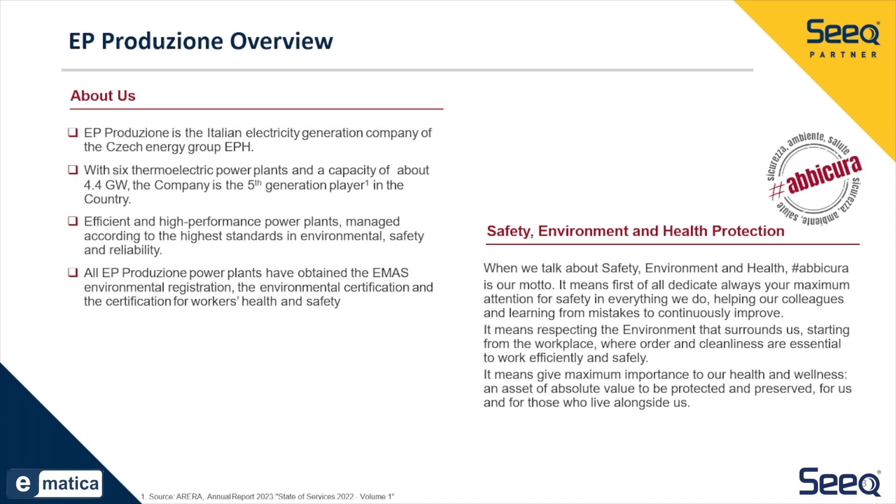EP Produzione is an Italian electricity generation company belonging to the Czech energy group EPH, with thermoelectric power plants of a capacity of about 4.4 gigawatts. Our plants are high performance and efficient, managed to the highest standards in environmental safety and reliability. All plants obtained the EMAS registration, which is an environmental certification for health and safety.

Our company really cares about safety, environment, and health. Our motto is take care, which means being careful at the workplace, to our colleagues, to our partners, to our clients, protecting our environment starting from our work environment, and giving importance to health and safety. These are our company standards for safety, environment, and health.

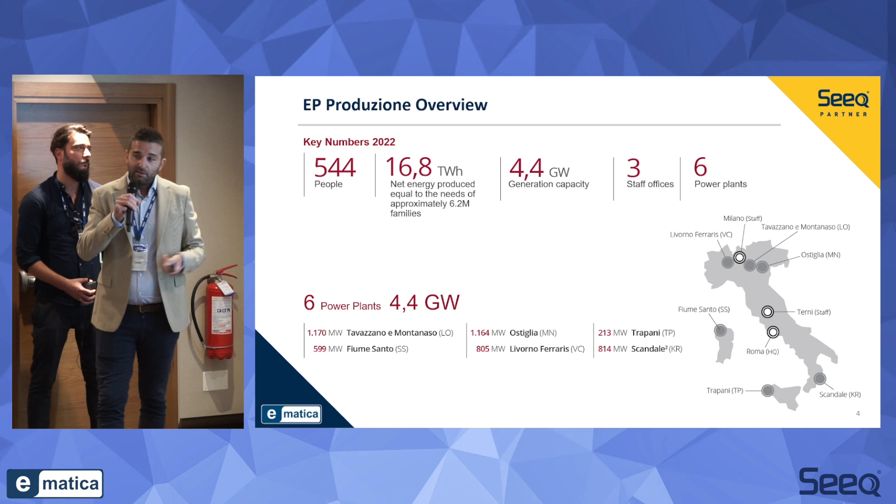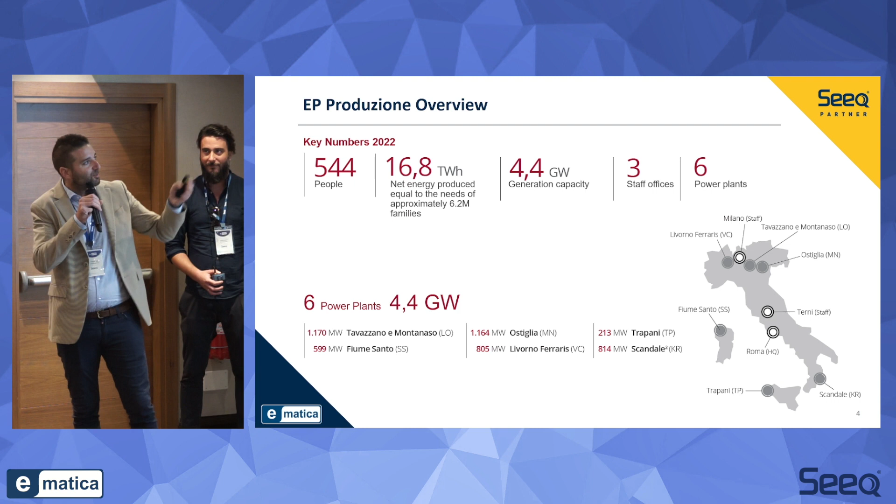Just to give you a few key numbers from 2022: there are around 540 people in our company. As Jessica said this morning, many people are older than 50, so that's a pretty appropriate number. We have a net energy production of 16.8 terawatt hours, covering approximately 6.2 million families, with 4.4 gigawatts of generation capacity across 6 power plants and 3 headquarters in Rome, Milan, and Terni.

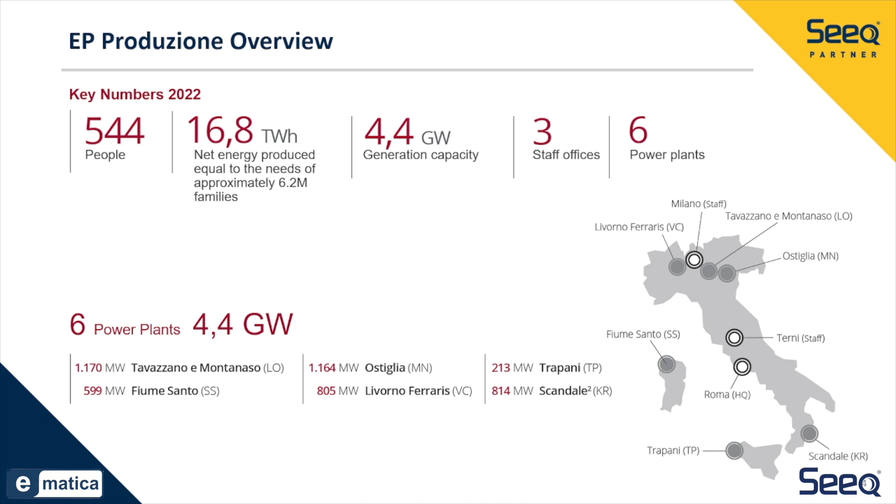With plants in the north: Tavazzano, Montanaso, Fiume Santo, Ostiglia, Livorno, Trapani, and Scandale.

We are continuously investing in improvement processes for our plants. We are currently building 2 new power plants, one in Tavazzano and Montanaso and one in Ostiglia, using the latest quality, performance, and low emission standards. In Fiume Santo, we are planning a multi-technological hub: a biomass power plant project for the production of onshore and offshore green hydrogen and storage systems.

As I mentioned before, we are part of the EPH group based in Prague, one of the largest electricity producers in Europe, with business activities in the Czech Republic, Slovakia, Germany, the Netherlands, the United Kingdom, Ireland, France, Switzerland, and Italy.

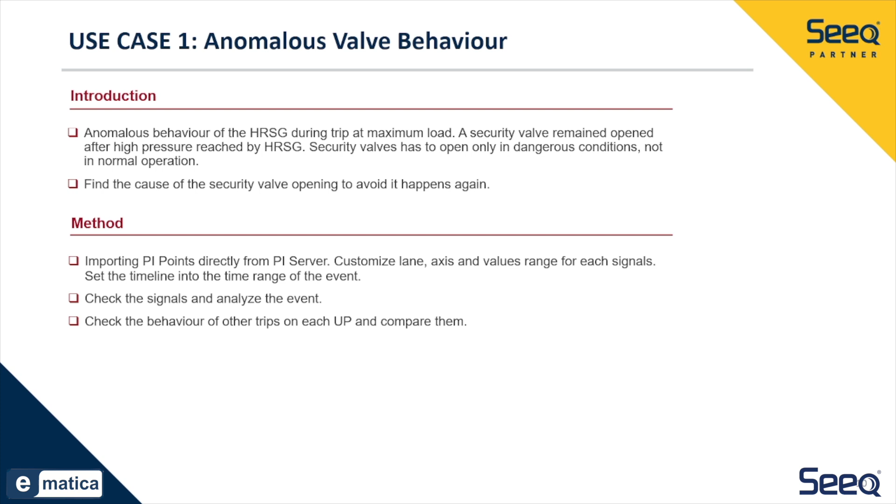How did we do that? We prepared a worksheet with Seeq and imported the PI points from the server. What's the added value?

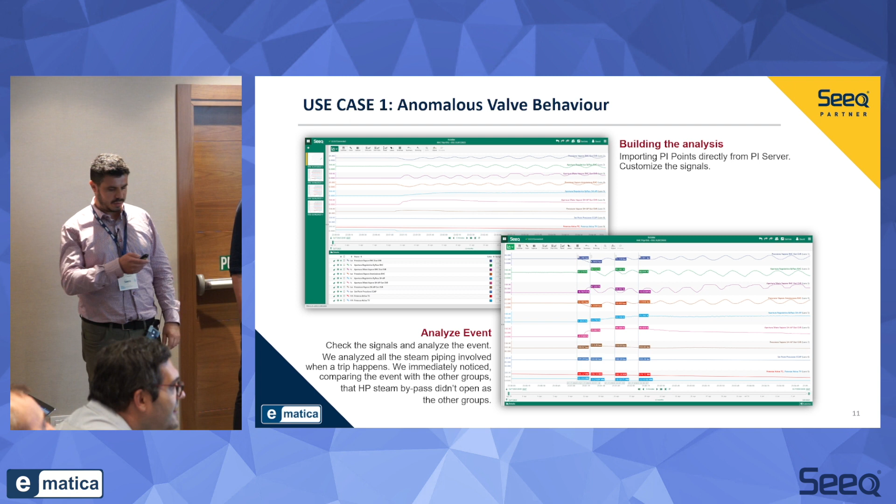In this case, we basically changed the way we analyze the event. With Excel, organizing this analysis can be very complicated, with just 2 axes, trying to size all the variables so that they match with the correct comparison. Whereas with Workbench, you're able to check the signals separately and analyze the event, thus immediately noticing, by comparing the event with other groups, what the issue was.

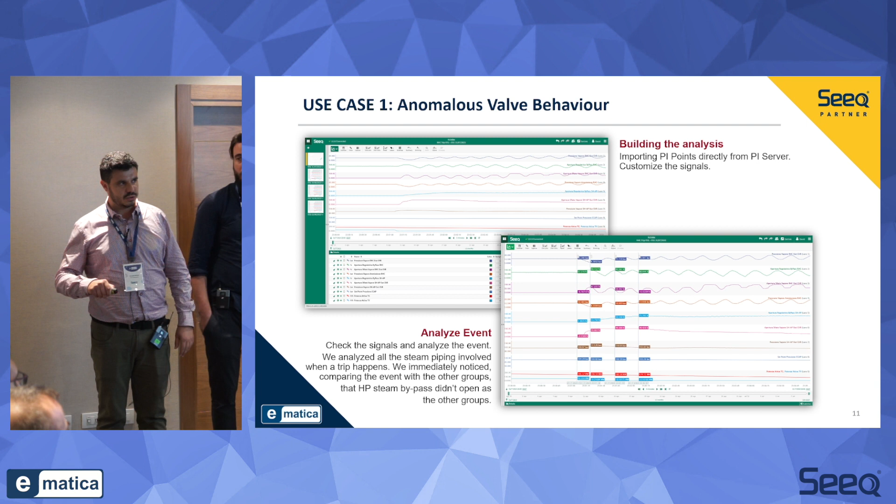So what did we do? We started analyzing the dimensions at place, the values they reached, and we tried to understand at first sight what could have gone wrong. This value, which corresponds to one of the valves involved, opened in a way we didn't expect. So basically the valve wasn't behaving the way it was supposed to.

So we thought, let's compare the other 2 valves in other cases and how they behaved. With this comparison, what seemed off to us was confirmed: the valve opened immediately instead of opening slowly.

Such an analysis could have taken days. Now, just 2 people in 10 minutes identified the exact problem, allowing maintenance of the plant to solve the issue.

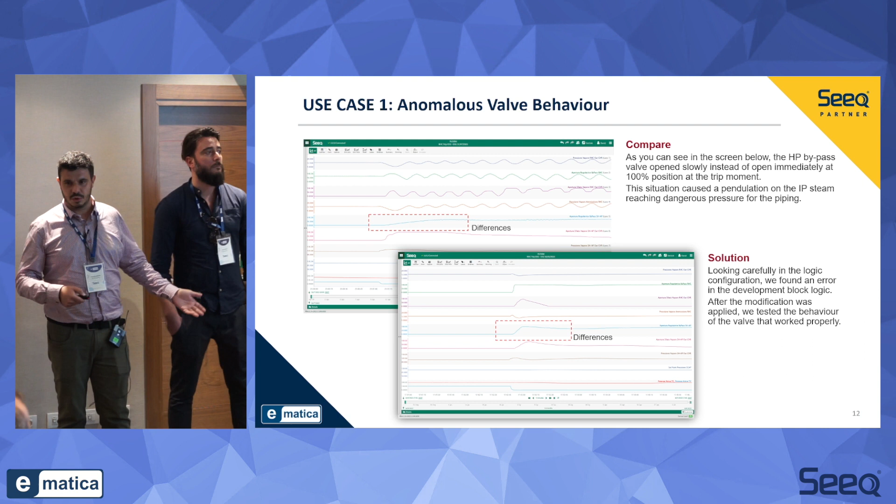So if that was the problem that needed to be solved, we looked at the logic and we wanted to make sure it was identical to the other groups. Now there was an error, and the block logic was modified, thus compromising the functioning of the system, of the valve.

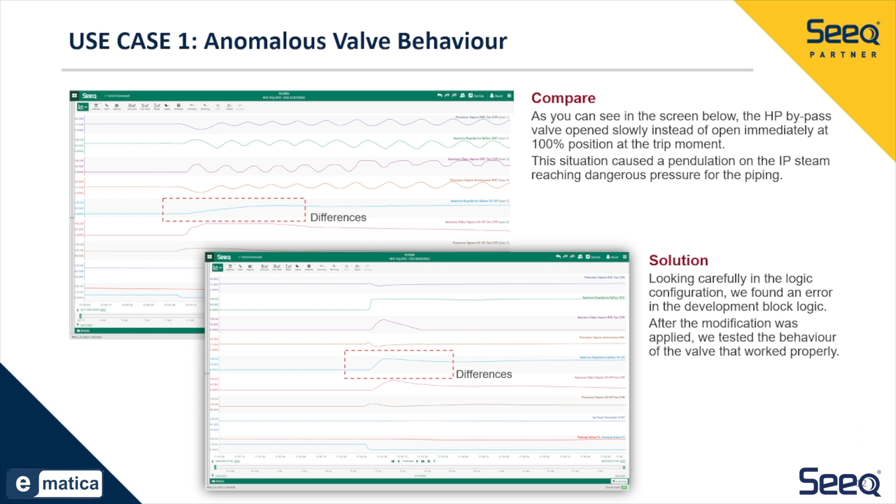And this, of course, caused security issues. So that's the solution of the problem. Let's look at the before and after picture. Verifying the events with Seeq allowed us to see this oscillation that was quite unusual.

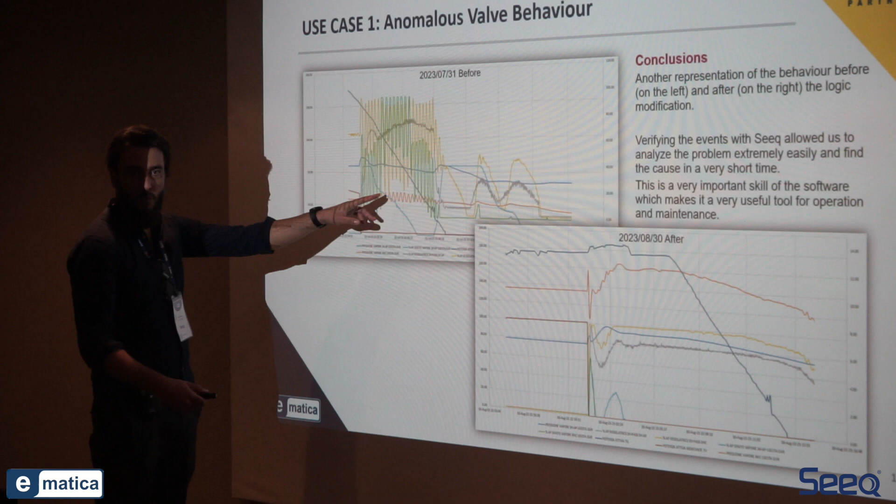We saw this variation going from 4 to 13 in a pretty weird way, and this caused the opening of the security valve several times, thus damaging it and leaving it open. So from the outside there was also an issue that was visible.

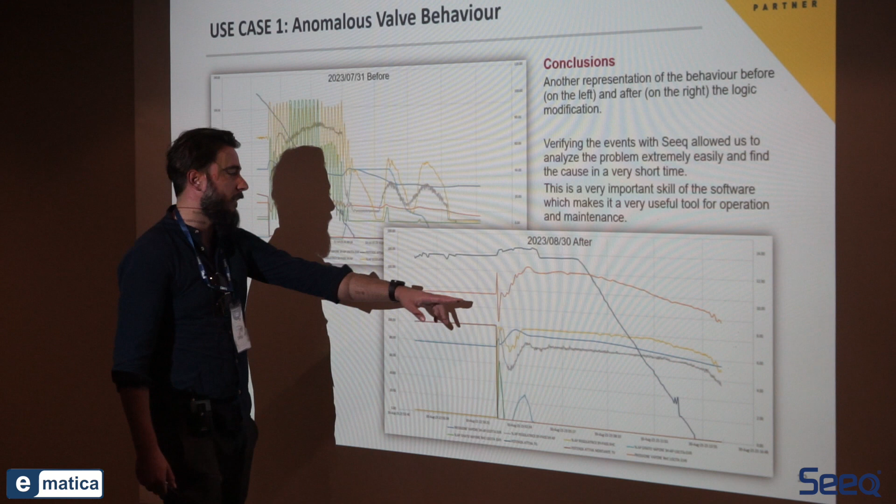After the change that we made, the chart shows a decrease in pressure, but then it recovers and goes back to normal. So with Seeq, we were able to analyze the problem extremely easily and find the cause in a very short time with capsules, and that's a very important skill for the software for operation and maintenance.

Thank you. Let me add something that we left out this morning. This type of analysis is very fast and quick, and it takes a very short training. A very normal user with no experience with Seeq, in 1 day of training, would be perfectly able to analyze these data in the assets.

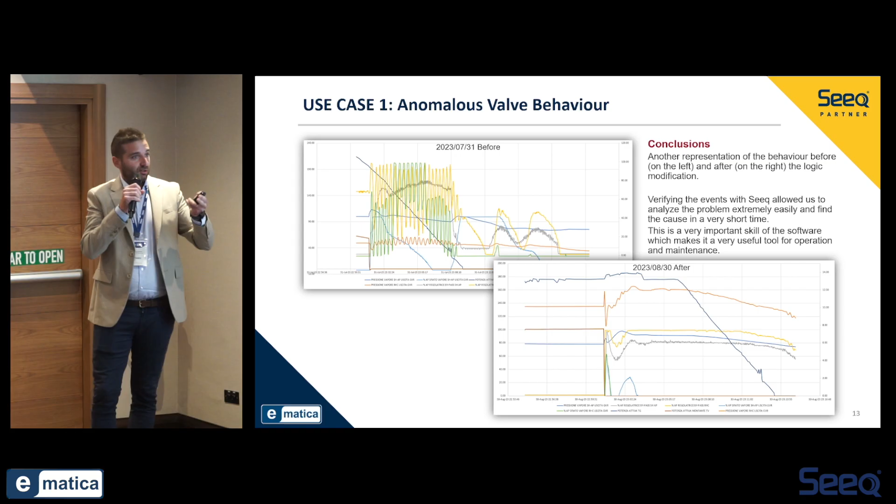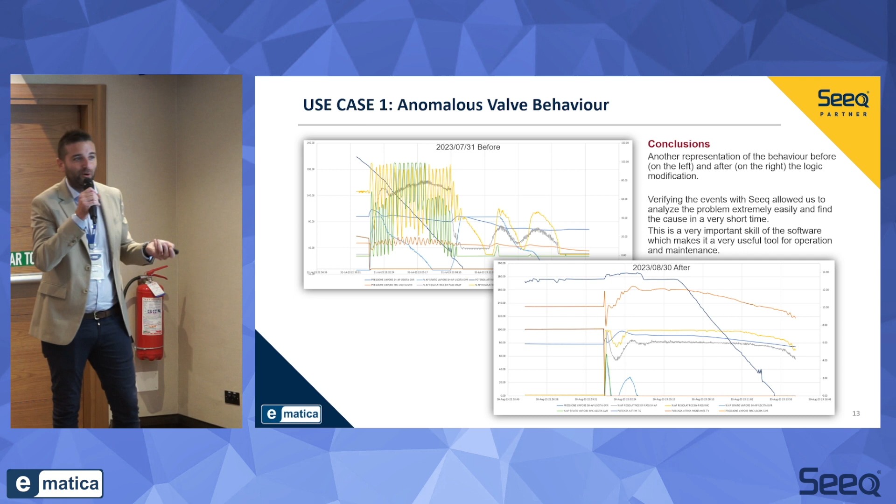So that's impressive. And another strength in Seeq is prediction. So we used Seeq together with the water demineralization. We tried having Seeq determining this value to see if we could find out something interesting in the tool, maybe for the future.

So this is what we did. We had different membranes. We wanted to check the dirtiness of the membranes online and during washes to check their effectiveness. We had this new demi plant, and we wanted to check the membrane's effectiveness, generating a report about it.

Now, the report was going to be useful both for maintenance and for operation, without having to go and check the HMI. So how did we do that with the tool?

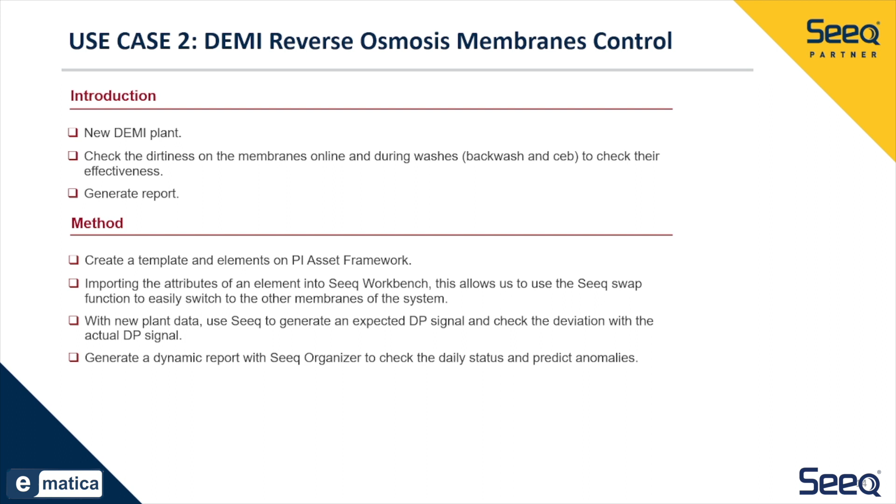Basically, we created a template, an AF template, starting from the PI AF template. Now, generating a template means generating an object to be used as a base for building the same element or similar elements. This allows you to map all the necessary measures and use the Seeq swap function. These are static points.

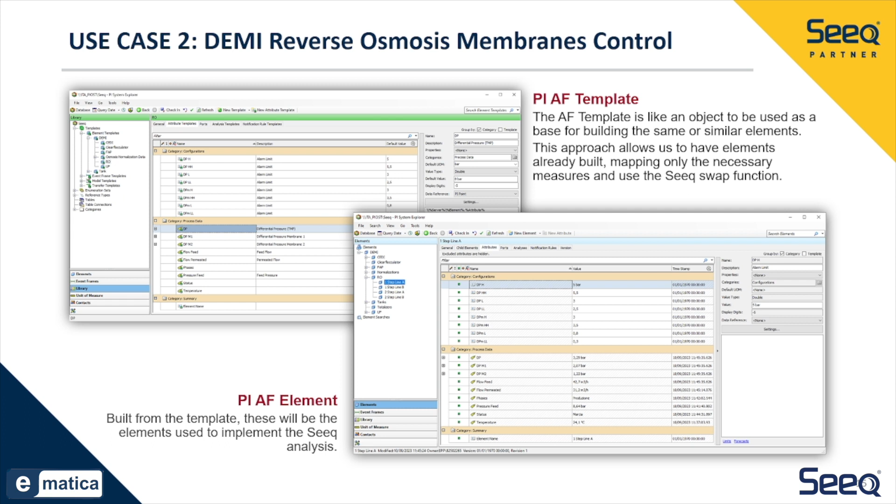Having done that, we created our first analysis with the AF attributes, importing the data into the Seeq workbench, and we started doing what we wanted to do.

So we took the pressure signal of the membrane, and the flow and temperature signals, because the temperature impacts the diameter of the hole, changing the pressure. And of course, the flow changes the pressure as well.

Basically, we were able to generate the functioning curve at a base temperature. And it turned out that the movements from the expected value to the real value, and from the total delta P to the predicted delta P, that was very good. As you can see, the expected/actual deviation is 0.1 or 0.01, so it's very good.

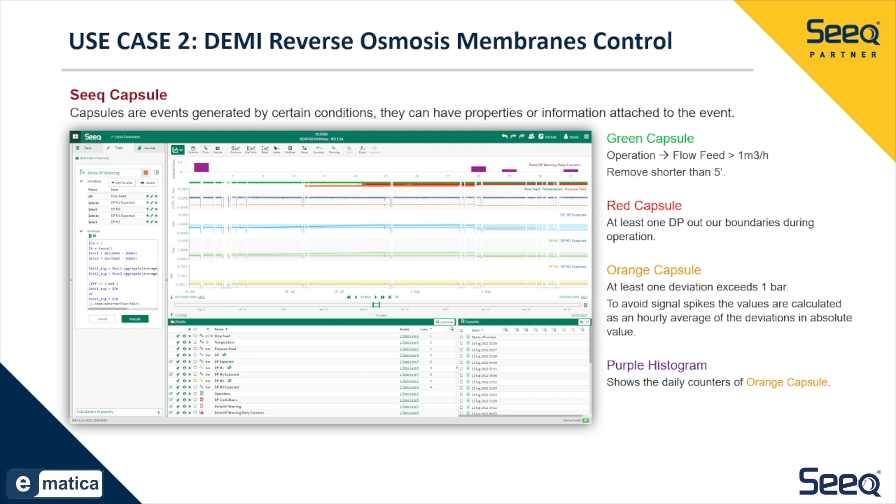that, as you can see, shows the daily counters of orange capsules on a monthly basis, so on a daily basis but over a month, showing the overall plant situation. Now this allowed us to see.

This was something that happened in July, a water anomaly. And we saw an increase in pressure. You can see it in the green membrane 1. Membrane 2 is working less, and it gets less dirty than the first one. So we saw a dP increase and 3 anomalous deviations.

At that point, we saw this warning event, we interrupted everything, and we carried out some more invasive cleaning interventions. And as you can see here, at the end of the activity, we went back to a normal functioning with the initial delta P, so right before the cleaning.

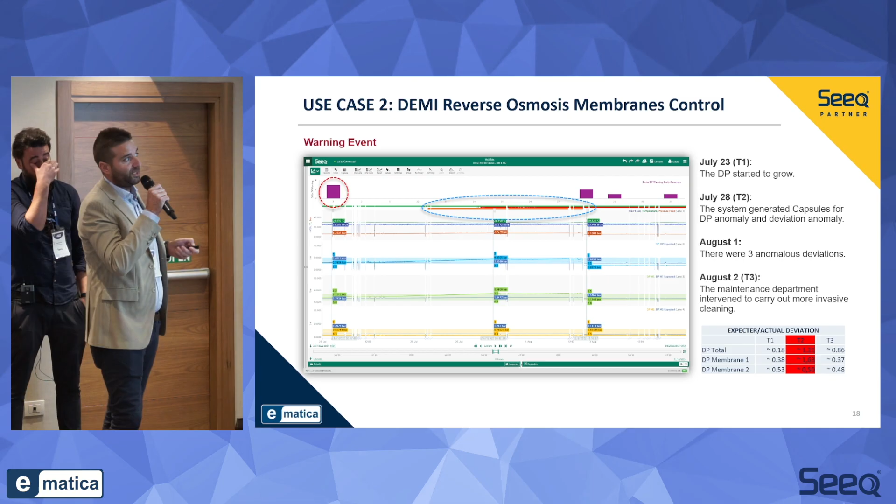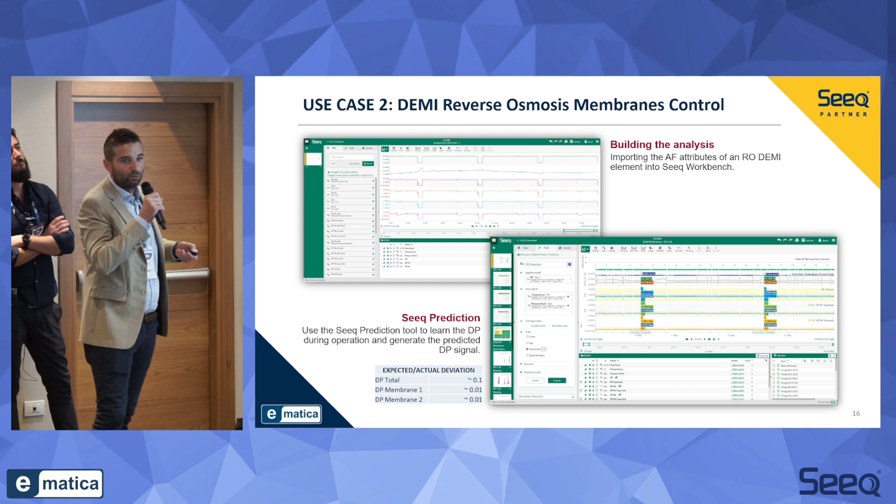So let's go back to this. Having generated a template before and analyzing all the events using the app function, you just duplicate this display, and using the swap function you can go back to the other asset, maintaining the whole analysis. You keep it all, and this allows you to have an analysis on a number of assets.

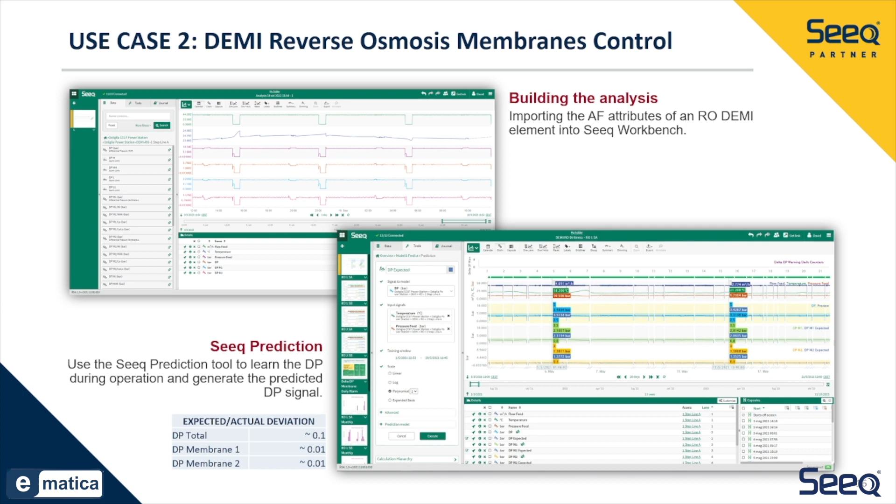And then we wanted to test the Seeq Organizer as well. This is a pretty simple report that allows operators to see over a day which membranes are experiencing some anomalies. It basically shows daily anomalies through a tree map view.

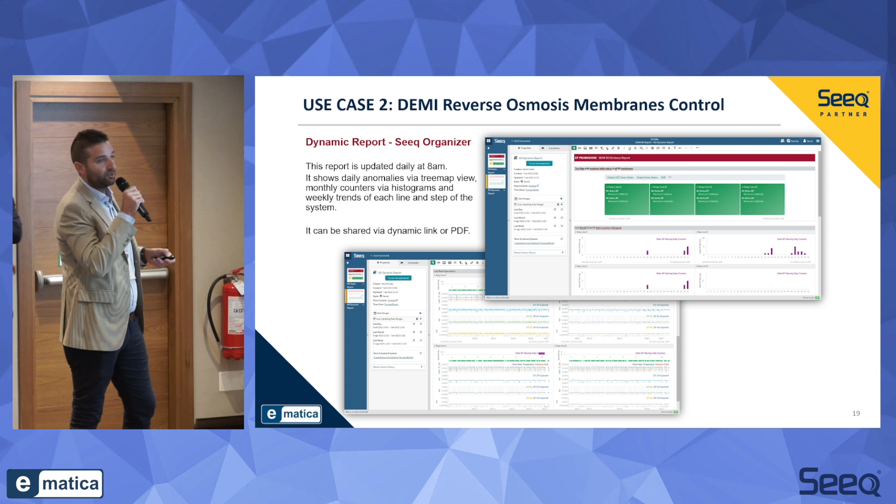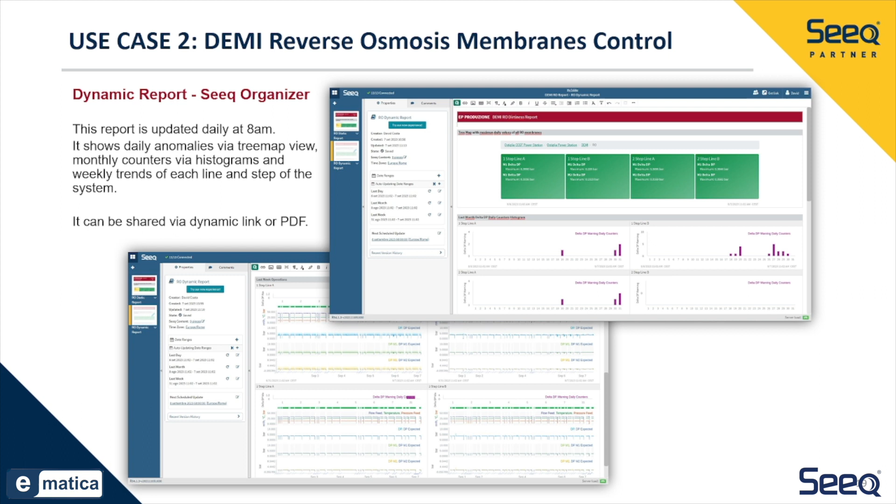And here you can see the monthly functioning of all 4 membranes and the weekly functioning of the different plants. This report was generated and implemented to be updated every day at 8 a.m., so when a person opens it in the morning, the data are updated. You can also create a PDF document, share it, etc.

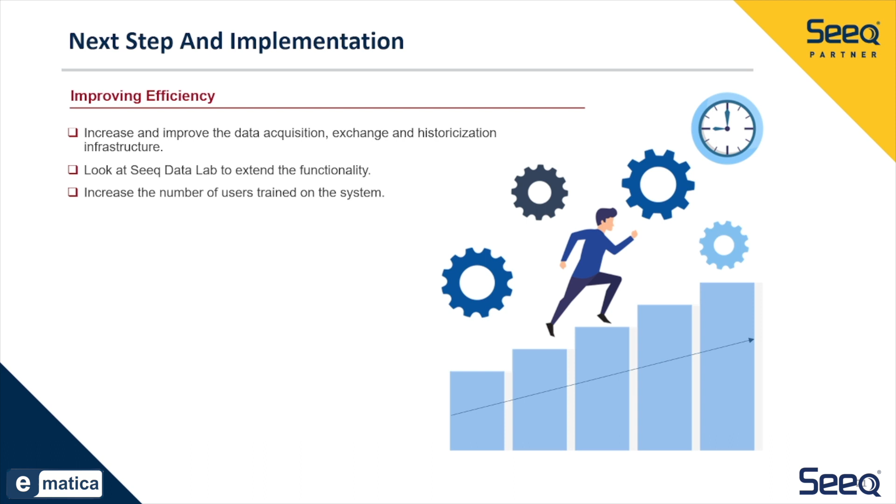So what are our next developments for the implementation of this tool? We want to increase and improve data acquisition, exchanging data and historicization infrastructure. We want to integrate the whole system.

It's a very powerful tool, but when we acquired Seeq, we assessed that we wanted to try part of it, because we didn't have enough time and resources to dedicate to all of Seeq Data Lab. So we want to really extend into that.

And users who are now using Seeq at plant level, engineering level, and performance level are going to increase, we want to really increase the number of users using Seeq.

So we want to improve system and system integration, system use. We want to improve assets and equipment used through Seeq and all of these tools. And we want to increase data availability.

So at network level, what we really want to do is make plant data available, not all of it, but at least part of it, managed by different areas, and integrate it with several systems we have, like Seeq at asset management level, or with another tool for shift management operations.

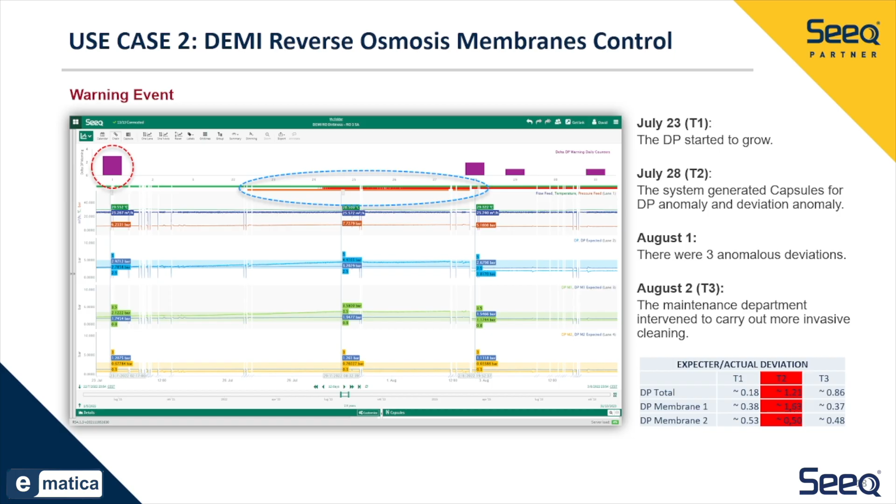Now, after the correction, after the cleaning, did you understand why it went below the expected value? You should ask the maintenance department, we had a very invasive cleaning. Yeah, we should ask the maintenance department, as I was saying.

This is a very small detail, but really, you were very careful. Yeah, you told us to ask questions. But yeah, basically, maybe you can answer this better.

Yes, the cleaning was very invasive, thus it might have compromised the membrane functioning. These membranes were not exactly the correct size anymore.

Okay, thank you, I was just curious. So yeah, he was the right person to ask. Any other questions?

You showed us interventions generated by the system. Now, we developed a tool to generate reports.